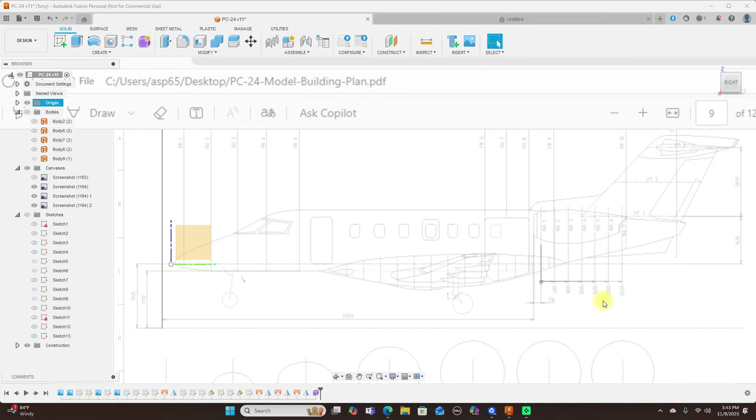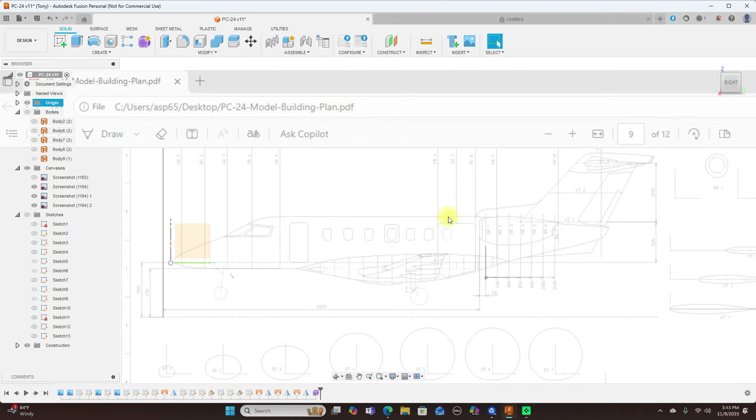Today I'll be showing you how to insert a picture onto a canvas like what we have here. We have the side view, front view, and top view of this. A few of my subscribers have asked how to do this, get this in here and aligned up. So we'll go ahead and do that. Let's start a new project here.

The first thing you do is come up to Insert and select Canvas. Then it asks you where you want your picture located from. So I'm going to insert from my computer.

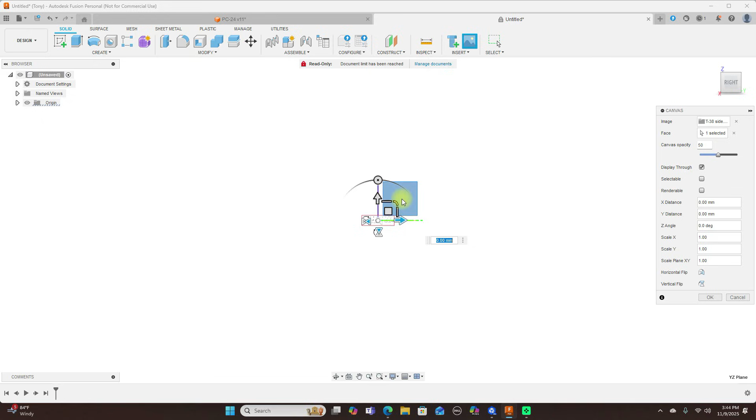Now here, as we can see, I don't have anything in here, so select Screenshots. I took a few screenshots, so select this side image, click Open, and I want to put this on the side. Then drag this out, or however big you want the picture to be, then click OK.

Now if your origin is turned off, turn it back on, so we see that. And the drop down menu here, this is the T-38 side.

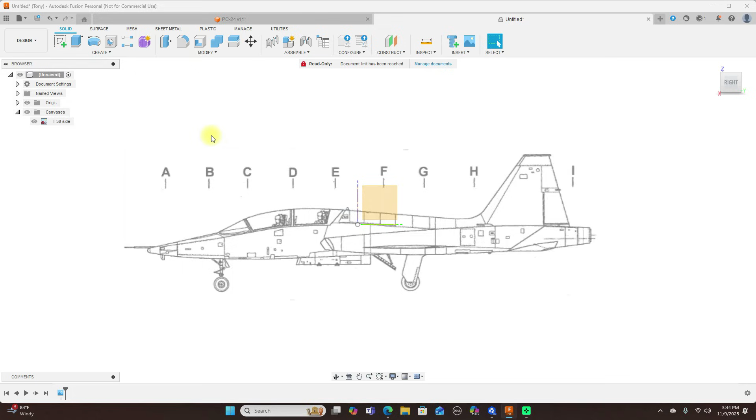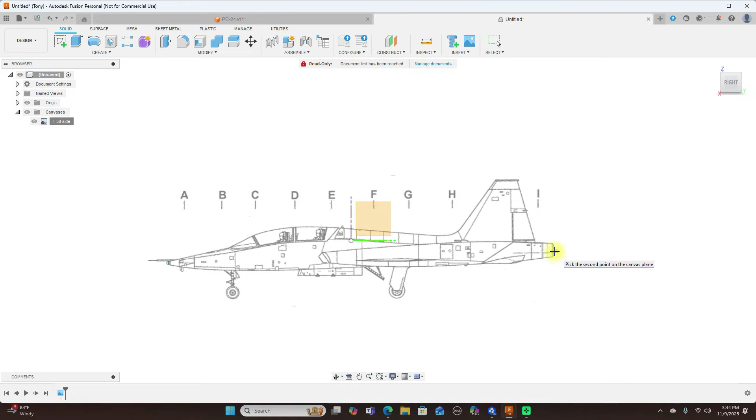Next, to scale this, right click on it and click Calibrate. Depending on what size you want this to be, let's say you want the nose from here to the back here, let's say 2,000 millimeters. If it's too big, just scroll in with the scroll wheel.

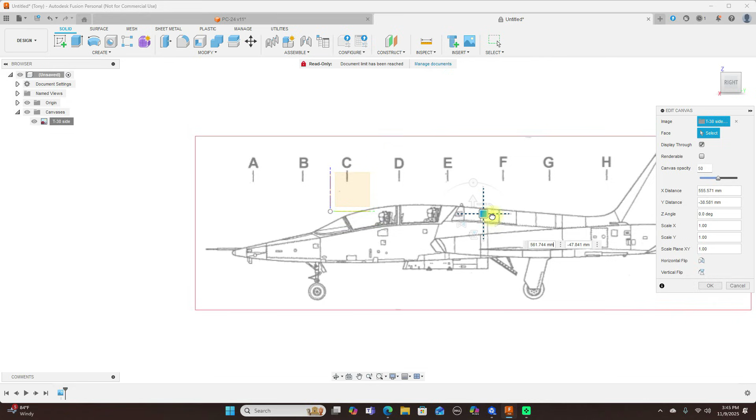Then right click on this again and select Edit Canvas, and all this does is allow you to move this now and leave the origin where it is in the center there, and just move this up to here like that. Click OK, and we have our first picture in here now.

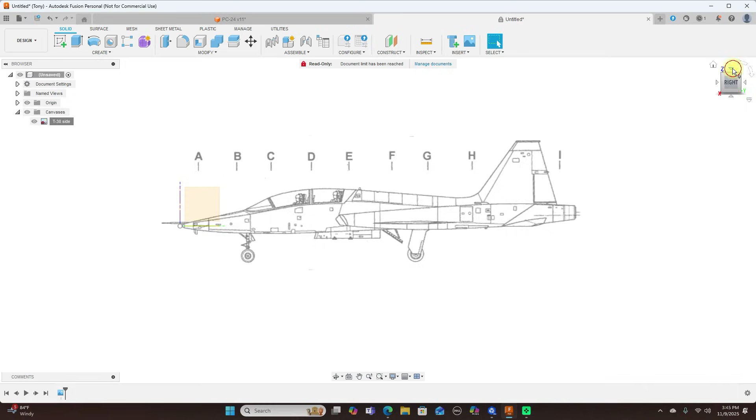Now I'm going to put a top view on here, so just click this. Again, Insert, Canvas, insert from my computer, and select the screenshot I took. This is going to be the top T-38, and click Open.

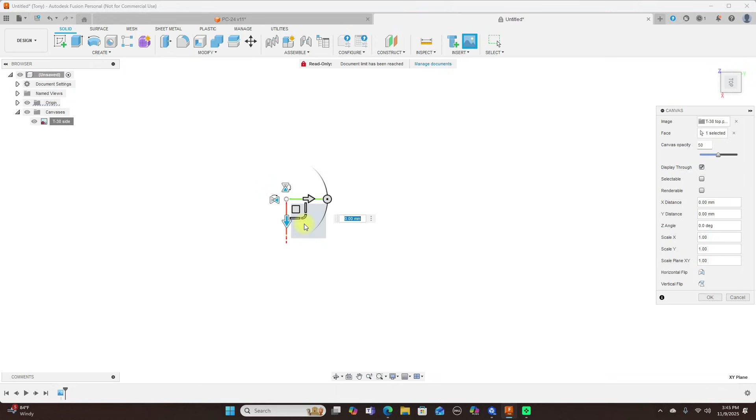Now it's asking what plane you want to put this on. I want to put this on this plane here, top, and drag this out. And I'm going to rotate this 90 degrees. Click OK, and turn the origin back on.

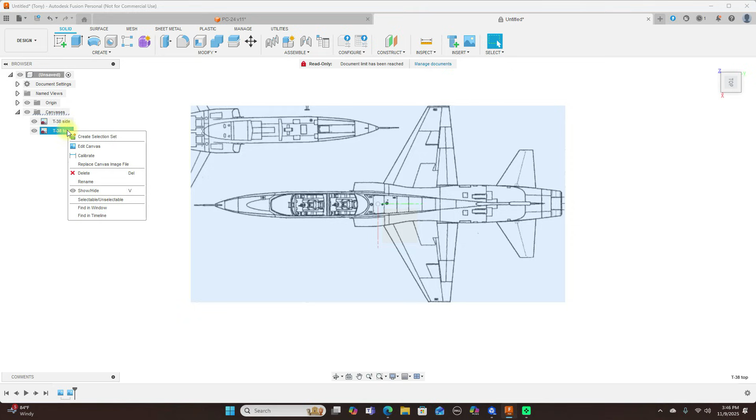And we want to scale this now. So this is the top, right click on it and click Calibrate. I want to select the front here like I did before, and the back here, and make this 2,000 millimeters. Click Enter.

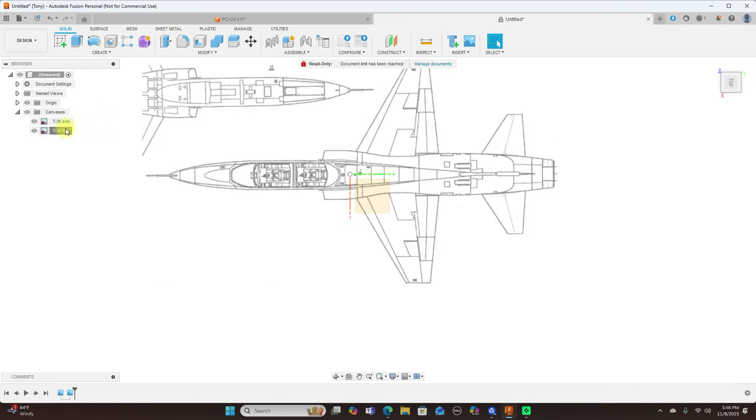Now right click on this again and Edit Canvas. I'm going to move this back and align this up with this dot here. Click OK, and we have that.

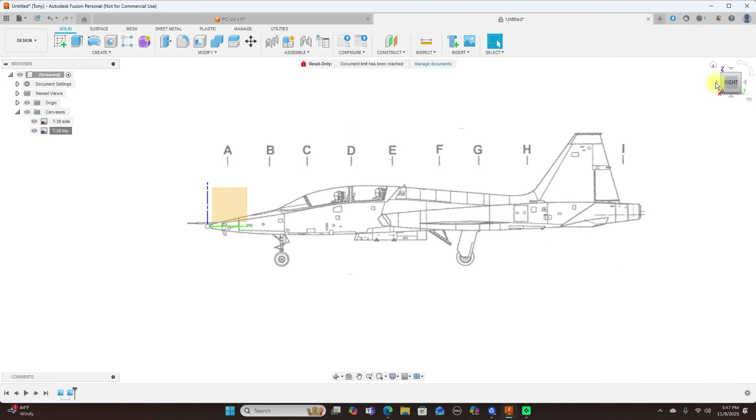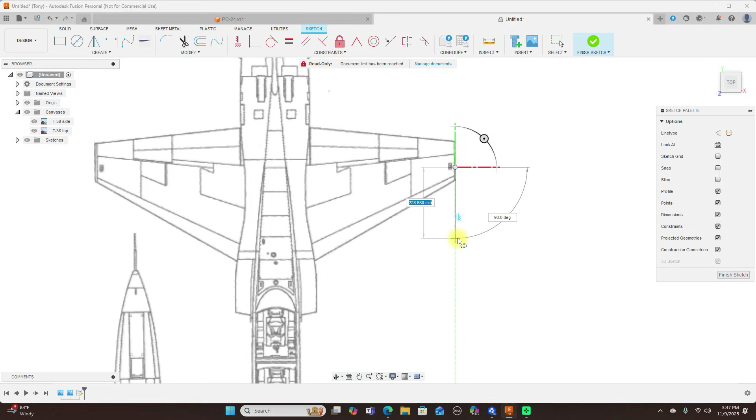Now with the front view, it's a little different, what I'm going to do. I'm going to create a sketch on this plane here, and use a line, just put it on the outside and drag it here.

Now we'll see how symmetric this drawing is on this plane. I'm going to use a mirror, and mirror this line here, using this plane. Click OK, and now we can see that

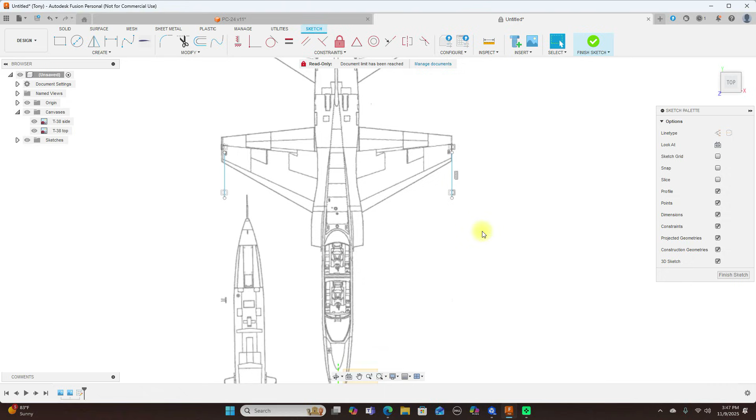this is slightly off a little, not too bad. But we can see this is not equal on both sides, so don't worry about it though. Go ahead and finish sketch.

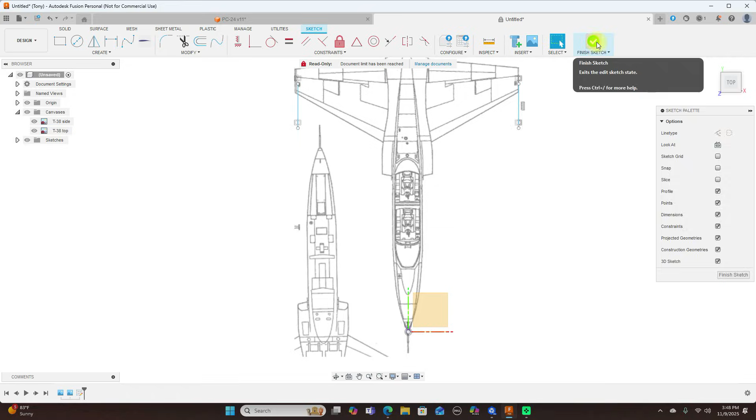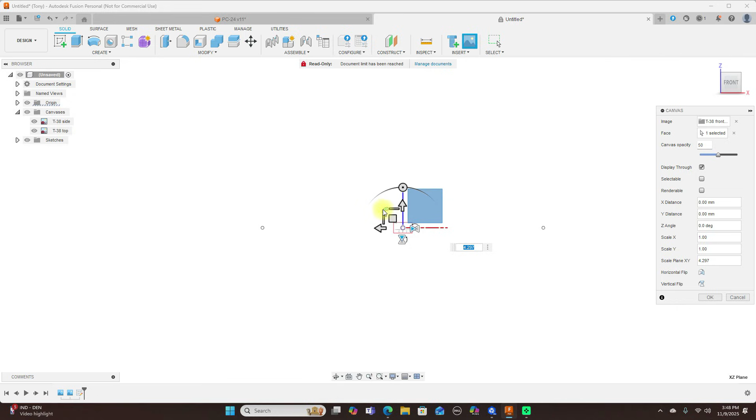Now, if these were really good drawings, then that would have lined up properly. So put the front image here: Insert, Canvas, insert from my computer, and use this front view. Click open, select this plane, and drag this out, so the wingspan is between these two dots.

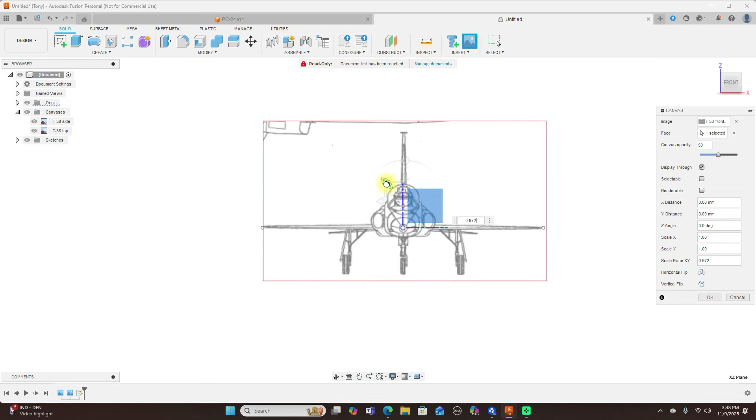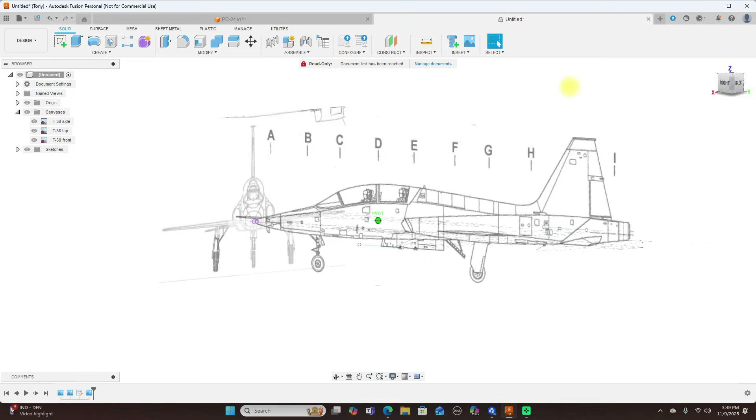Click OK, and we have that there. Now, if you have a rear picture of this too, what you can do is put a plane back here. So let's turn the origin on.

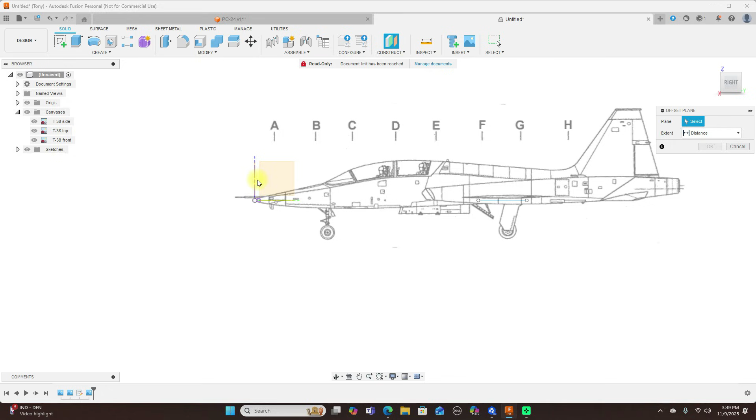You come up here to construct and select offset plane. Select this and drag this back here. Click OK. And we have a plane back here. But I don't have a back picture of this, so I'm not going to worry about it too much.

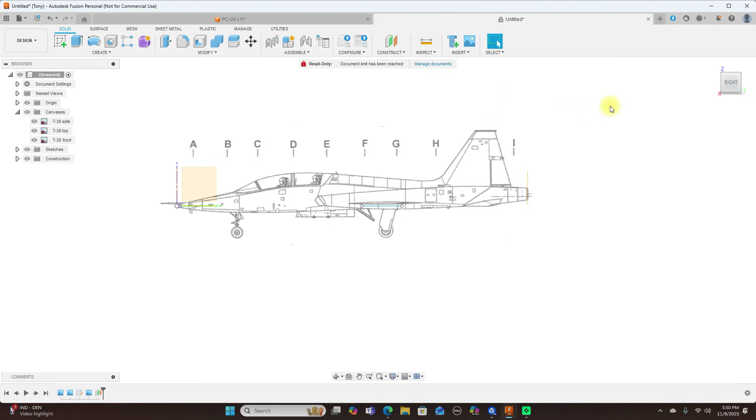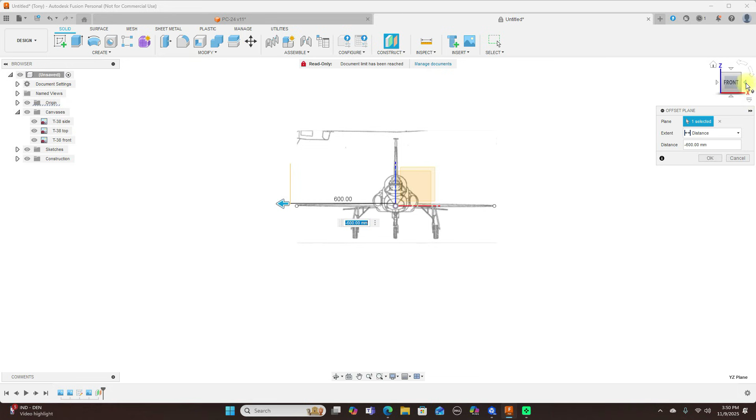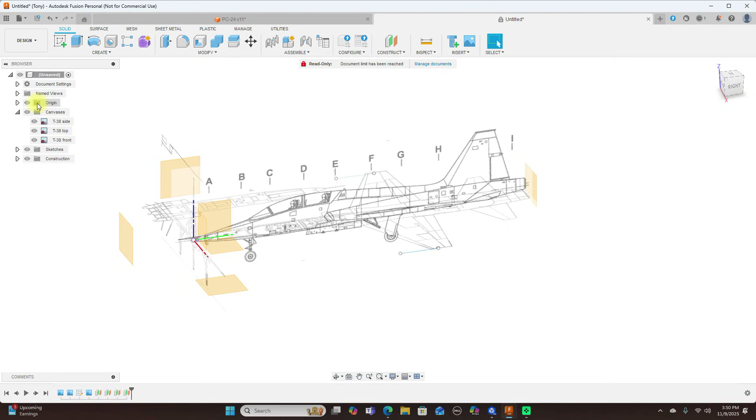But what you also can do, and I've seen a lot of people do too, is again take an offset plane, this here, drag this over here, and also one more offset plane, this one here. Turn the origin off, and now we have 4 planes there.

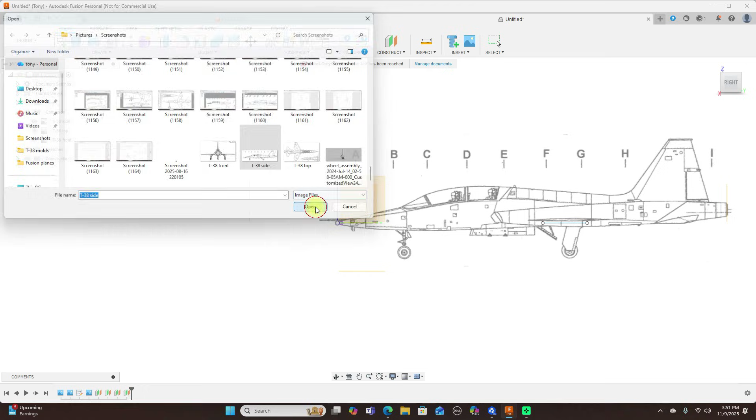I've seen some people put their pictures like this, and let's do an insert, canvas, side view, open. Then you select this plane over here and put that side view on.

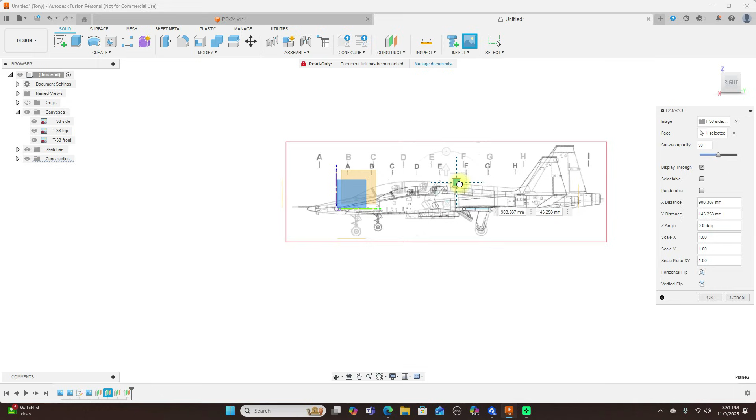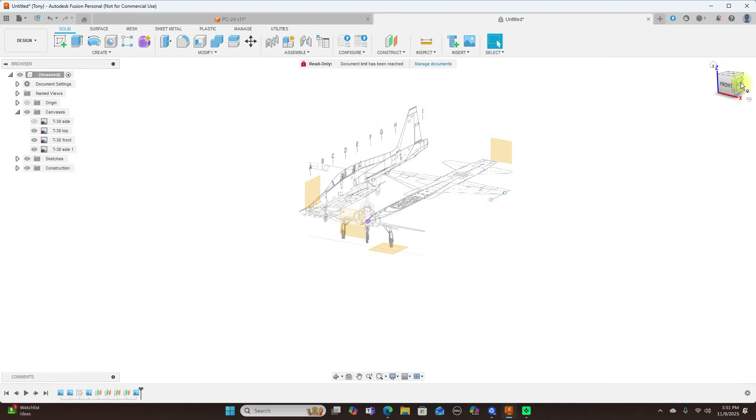Now, when you go like this, rotate it slightly, this is off to the right. So now when you start modeling this, your model will be here instead of on top of the canvas here. Some people like modeling that way better. And let's go ahead and put the front one in also.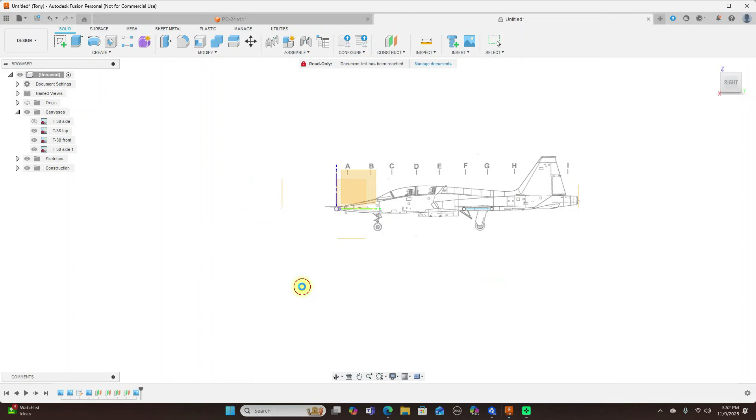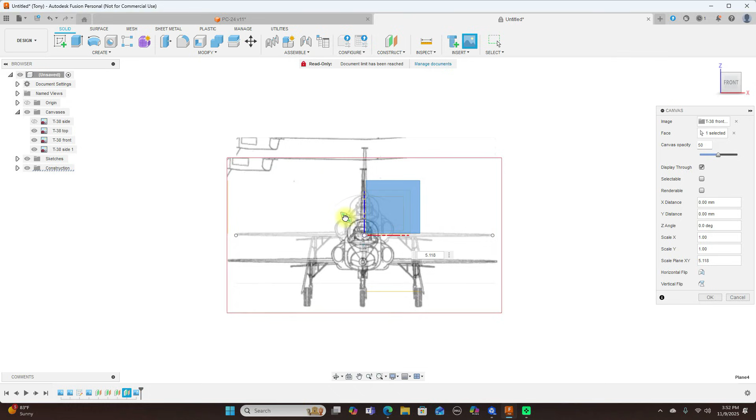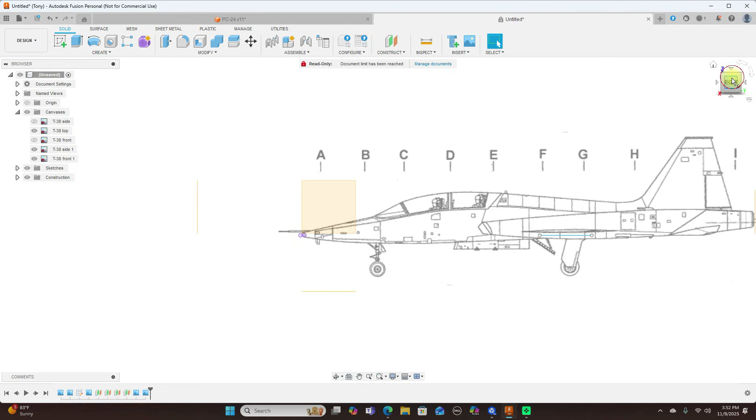So it's up to you how you want to model the airplane, how you want to put the pictures on the plane. And then we can turn off the front one here and then put the top one in.

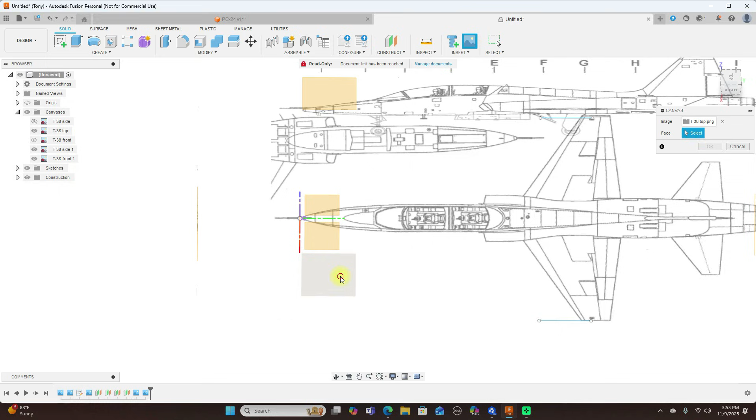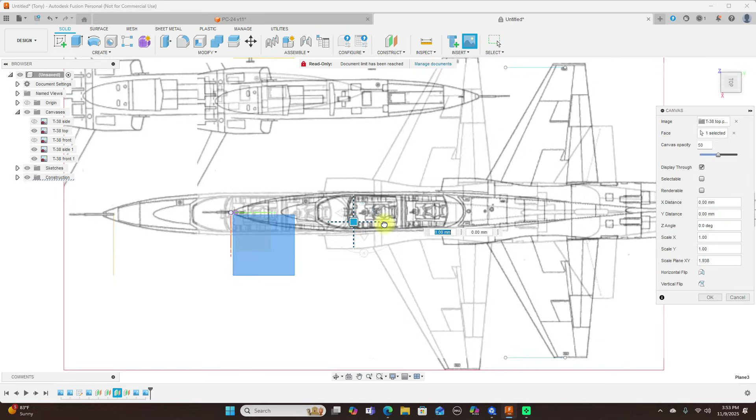Open. Then rotate this and make sure we select the right plane here. Select this one. Rotate this. Okay, and then we can turn this one off here. Now you can see this is all lined up like this.

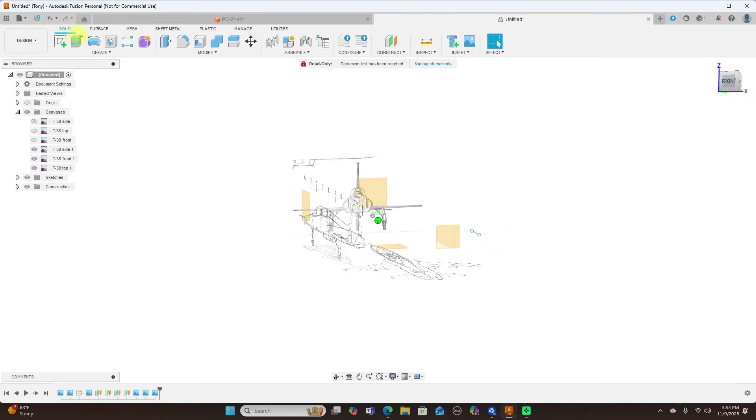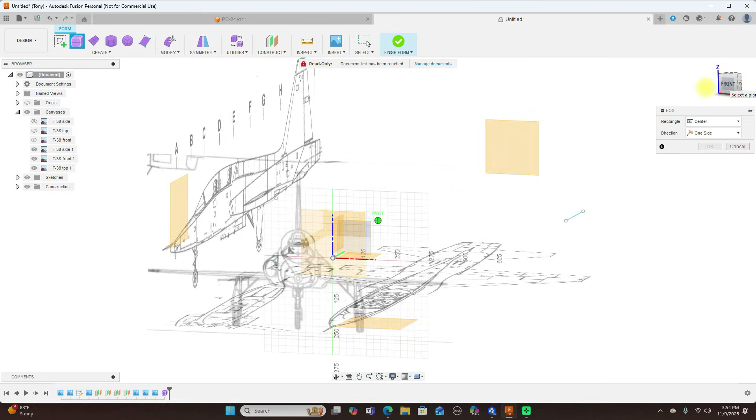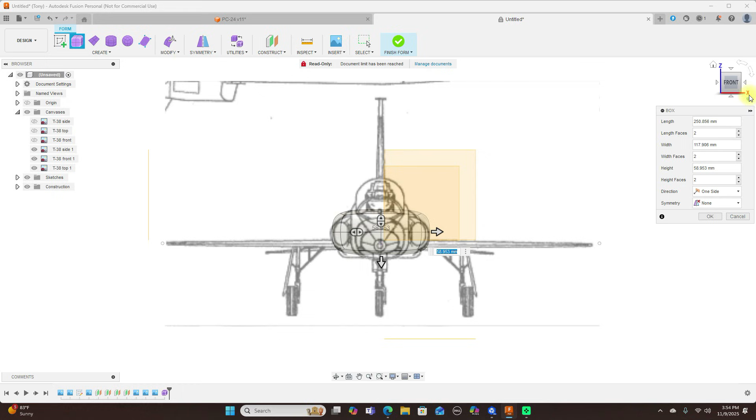So now when you start modeling this, let's go ahead and do some. I'll show you. Okay, just want to show you that. So when you start modeling this, you'll see that this will be separate.

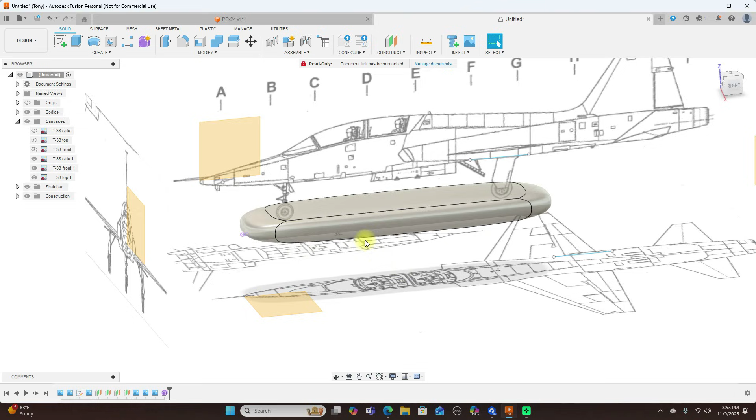I mean, this will not be on the planes. The picture, well, like this canvas won't be in the center, and this up here and this up here. So it'll look like this when you model the plane, but the results are still the same no matter what, if this was centered.

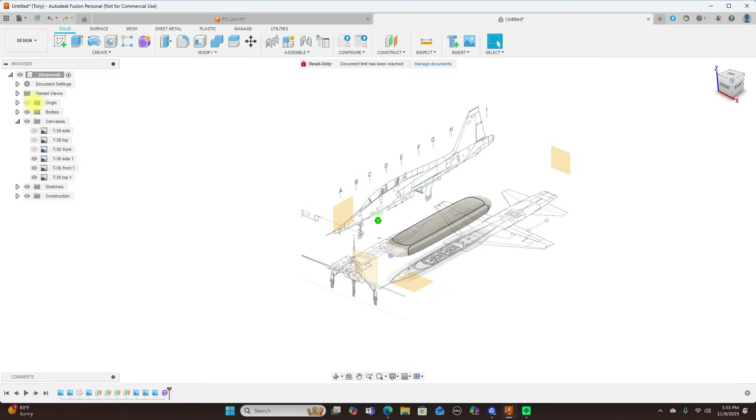You know, the canvases were centered over here. But a lot of people, well, I wouldn't say a lot of people, I just know some people like modeling airplanes like this. And there's nothing wrong with this. It all depends how you want to do it.

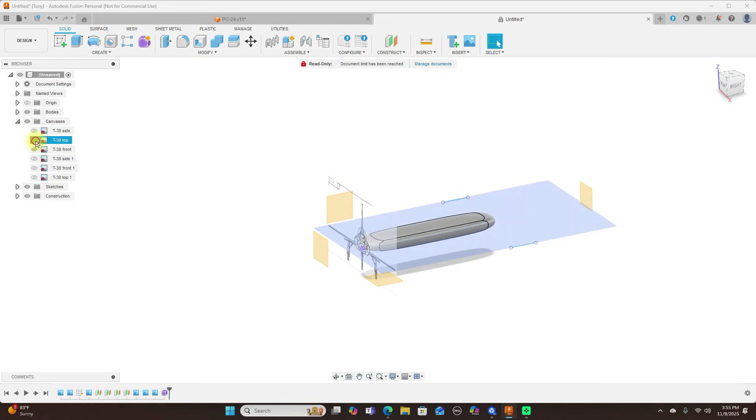And so we can turn these off and turn these back on. And then you can see now the canvases are on the form too.

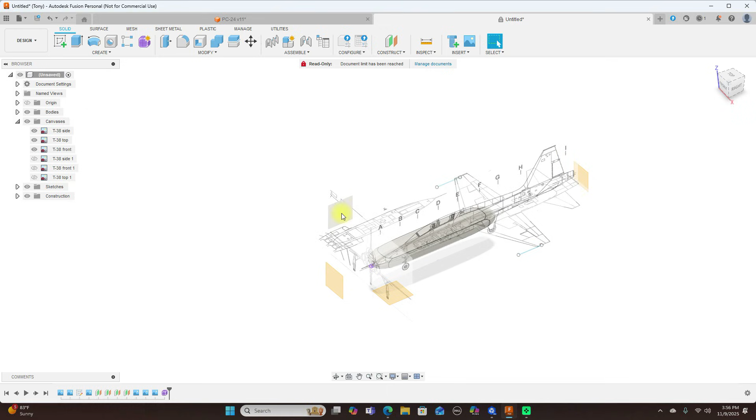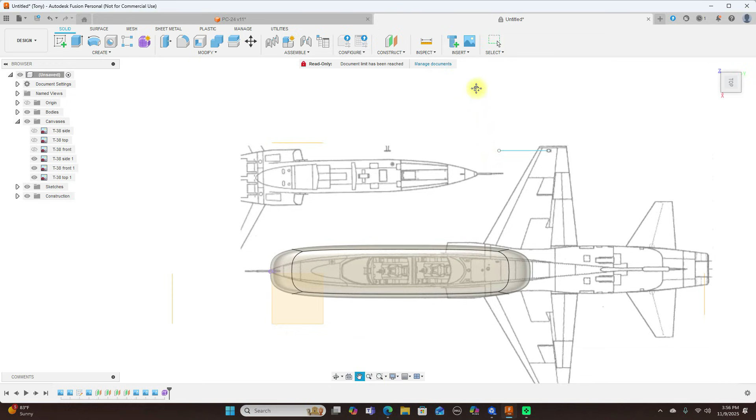And if you don't want to model with the canvas on the form, then just put your 3 offset planes or 4 offset planes, and then put your pictures onto these planes like I showed you here. So again, when you're looking at this from the side, this will be your side view, even though this canvas is not directly on here, but the results are going to be the same, just like when you look at this from the top. Again, you're going to model like this.

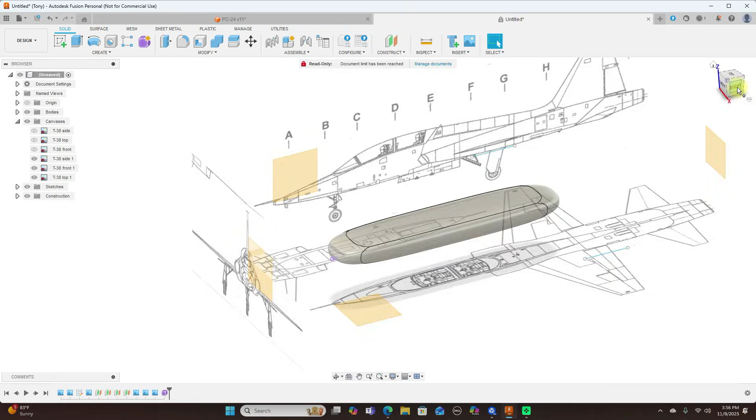Same thing with the front. And then you'll have this just floating like this. But yeah, that's how you do that.

Anyway, that's going to do it for this video, and I hope this video helped some of you guys out who are just now getting into Fusion and trying to figure out how to get the pictures onto a canvas and how to get them scaled up, the pictures and everything. So that's how you do this.